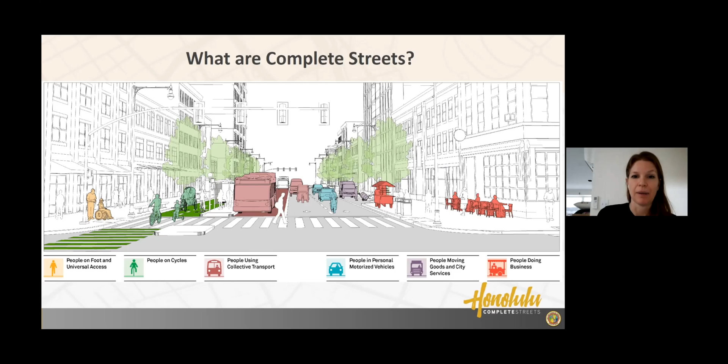Complete Streets actually is a city and county law. We adopted this in 2012, and it says basically every time we touch a street, so if we were repaving a street or something, we have to consider all the different people who want to use that roadway. So what we do is we typically envision those changes ahead of time, and then when a project comes up, say even like a sewer or a water project, something that rips up the roadway, we have an opportunity to put back changes when they fix the road.

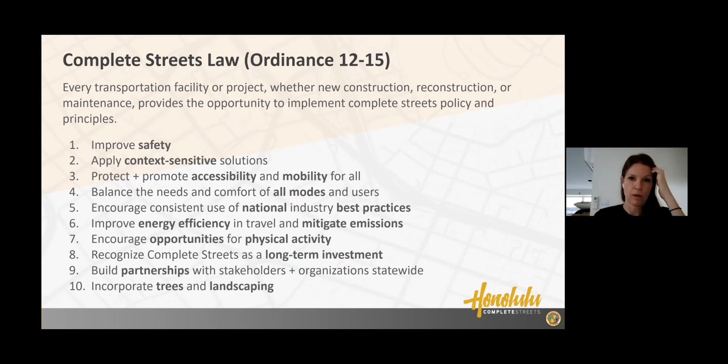And there's lots of different reasons to do this stuff, but as you can see here, the number one goal really is to avoid crashes and make sure everyone is safe. This is a kind of underlying principle that we follow, that one of our major goals is to really control the speed of cars on our local streets.

If you are a pedestrian and you are hit by a car traveling at 20 miles per hour, there's about a 9 out of 10 chance that you're going to survive that crash. On the other end of the spectrum, if a car is driving 45 miles per hour, there's about a 9 out of 10 chance that you will not survive that incident. So one of our goals really is to try to control speeds and bring them down slower to be more consistent with people who are not driving out on the roadway.

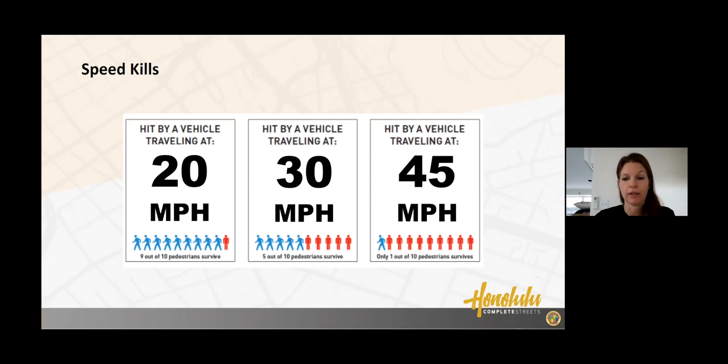And then, you guys are going to get into lots of different principles about traffic engineering, I'm sure, through your program this summer. But one of the cardinal rules of traffic engineering is that you design your streets for, say, the morning rush hour and the afternoon rush hour, right? So you take the busiest time and then you size your streets appropriately. Can you guys think of a problem with that approach?

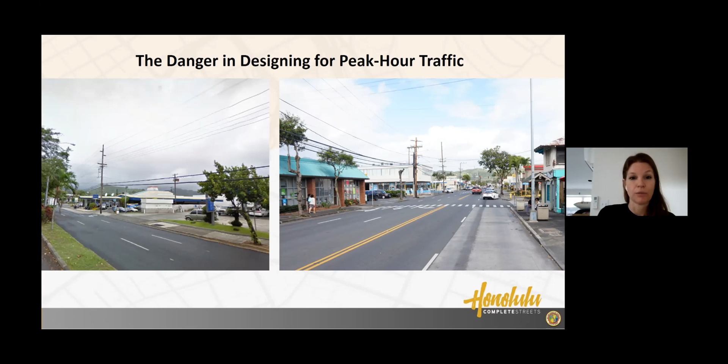What happens for the other 22 hours of the day when traffic is not that high? Then we end up with streets that are basically too big, too wide, very hard to cross, and with less traffic, people can speed on those streets as well. So just something for you guys to explore as you learn more about this profession this summer.

And one of our particularly vulnerable populations that we're always worried about is our kupuna, our seniors. Our grandma and grandpa and everybody. A lot of those people don't drive because either they don't feel comfortable, they don't have a driver's license anymore, or they take the bus because it's cheaper or whatever reason. A lot of those people are out walking and trying to get around on our streets. And unfortunately, we actually have a very high fatality rate for senior pedestrians. So just some of the risks of having streets that are not designed for everybody who may be using them.

And then, talking a bit about bicycles, we do bicycle projects, and those of you who live on Oahu, I'm sure, are somewhat familiar with, say, the King Street Protected Bikeway. One of our goals is to do better bicycle projects. For a long time we did bicycle lanes where we just painted a stripe and then hoped people would ride there, but we're learning that about half of people would like to bike, but don't feel safe with those minimal bike facilities or with no facility. So what we're really trying to get to is building safe bicycle facilities that attract the most number of people. And a lot of those people are very reluctant to mix in traffic, I personally being one of them. So we do a lot of bike projects.

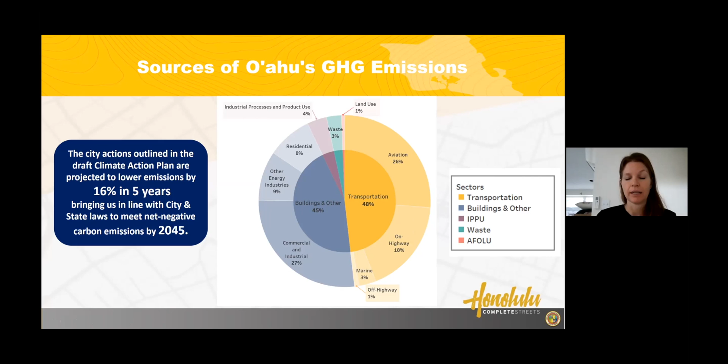Another one of our charges is to help reduce greenhouse gas emissions. So as you guys can see from this pie chart, this is on Oahu. About half of our greenhouse gas emissions are from the transportation sector. So aviation makes up a huge part of that. Obviously, we're not suggesting people walk or bike to the mainland or neighbor islands, but on highway, this is kind of our area where we can try to provide facilities to shift people who may be able to leave their car at home and maybe take a more sustainable means of getting around, either a bus or walk or bike. So that's kind of one of our climate goals as well.

And then related to that, we do a number of improvements with street trees. This shows some examples of new trees being planted, and then stormwater quality, working on some permeable pavements here so that when the stormwater or rainwater hits the street, which is another function of our roadways, right, is to capture stormwater and channel it. The stormwater can actually percolate down into the ground instead of just being flushed through a large concrete channel out into the ocean, which is not good for our reefs and for our ocean health.

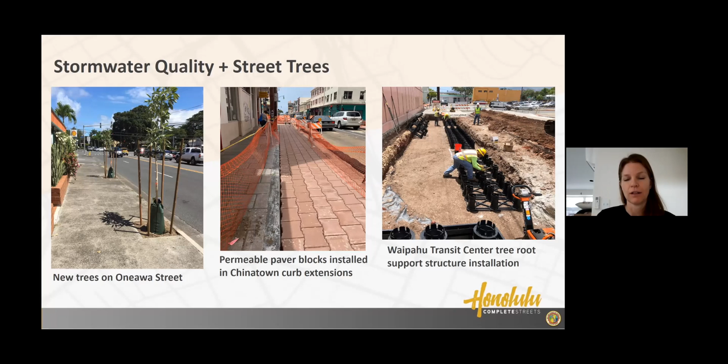And then the picture on the right shows a Silva-cell installation, which goes underneath the sidewalk and provides lots of space for tree roots to grow. So we can get nice, healthy trees on our streets too. So if you do walk, there's lots of shade and it's beautiful, and all those other amenities that go with the transportation function. And then we also deal with transit projects.

So some of you who live here maybe have seen this new bus-only lane that runs through downtown Honolulu, basically taking one whole lane and saying this is for buses. There's so many buses on this street that it's important for us to have a bus-only lane and make sure the bus can be efficient. And then we also have projects like this out in East Kapolei, a number of projects helping people get to and from the new rail stations or the future rail stations out there. So some bus stops at the stations, crosswalks, all that stuff.

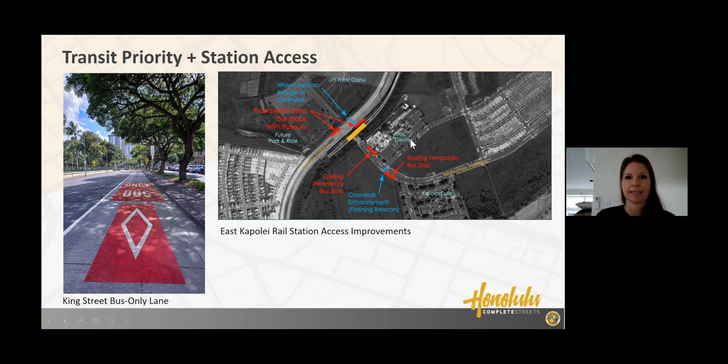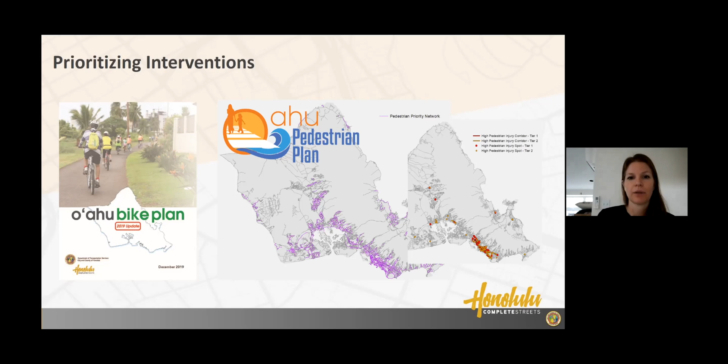We follow several guiding documents, planning documents, that you guys will probably want to reference in your project. One is the Oahu Bike Plan, and that lays out desired bicycle routes all across the island. And then Daniel has been the project manager putting together our first ever pedestrian plan, which we will be releasing in draft form shortly. And those identify crash hotspots for pedestrians, priority missing sidewalk segments, and other priority pedestrian corridors.

So some of the common issues that we see on streets, a lot of them have to do with streets being too wide. So some of our common crash corridors: arterials with 4 or more lanes tend to have more crashes than streets with, say, 2 or 3 lanes. Where speed limits are over 30 miles per hour, we see more crashes.

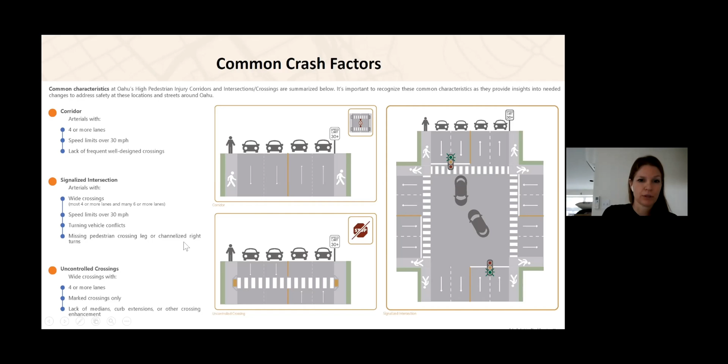Signalized intersections, the same thing, these sort of wide crossings where pedestrians are trying to get across 4 or more lanes of traffic at once. And then signalized intersections, there are a lot of conflicts, right? So intersections are where multiple directions of traffic come together, and there's a lot of different maneuvers and large potential for incidents. So signalized intersections don't seem to fare, I don't think, that much better than non-signalized intersections, probably because they're just busier. But again, it's usually where we have lots of lanes for people to cross. So these are just some of the things to kind of keep an eye out for if you're out on the street looking for conditions that are or are not safe.

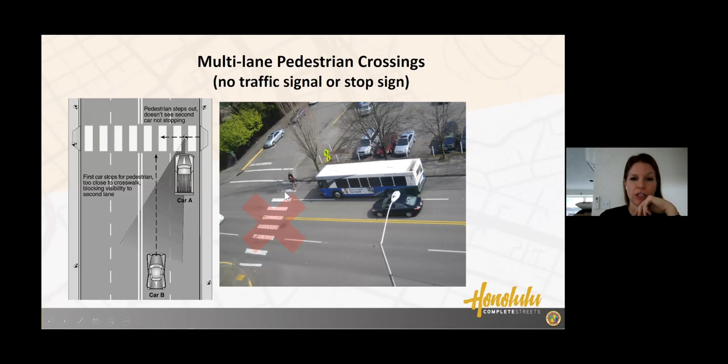Another issue related to the multi-lane is some of our pedestrian crossings. So you guys may have experienced this before. Say you have a crosswalk across 4 lanes of traffic, and these people are waiting to cross, so they'll step out. There's no signal here, right? We're just relying on drivers to stop and to yield. This guy will step out, but because this person in the black car can't see these people walking behind the bus, they may zip right through. So these multi-lane roadways, again, create some safety challenges for pedestrians trying to get across the street, and it's something we gotta address. And so here's some tools for that, right?

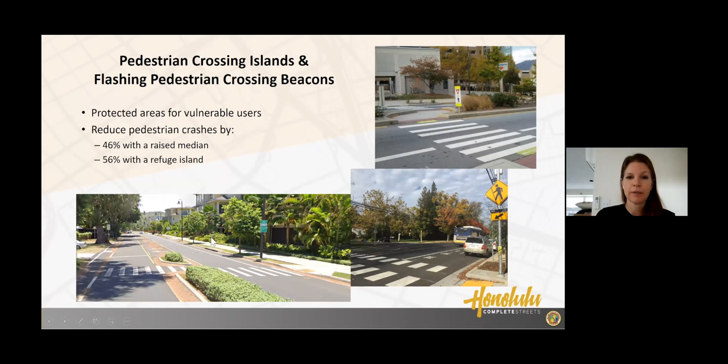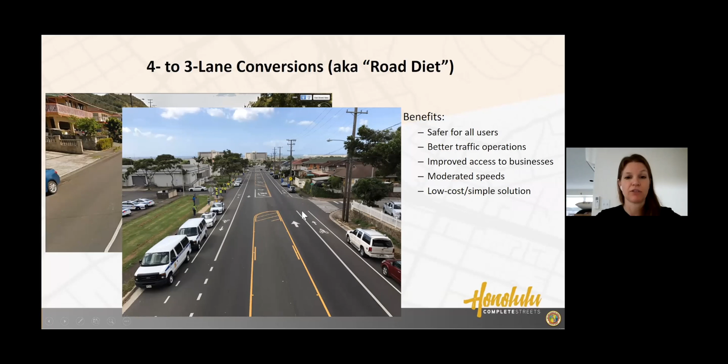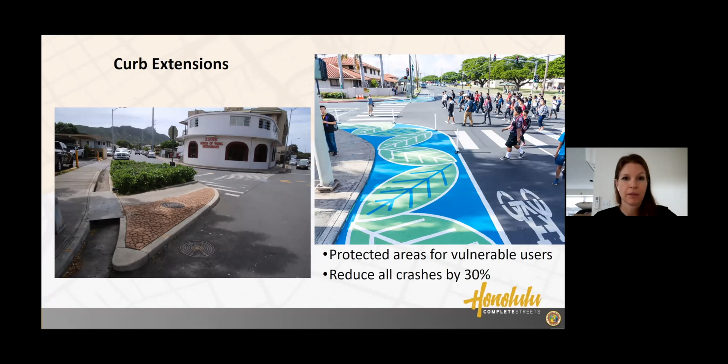Another tool in our box is something called curb extensions. So these are at intersections, and they basically take up space that is really not needed for anybody. You can't park at the intersection anyway because you'll block visibility. And so we like to use different kinds of curb extensions to shorten pedestrian crossings where they are most exposed. So these are obviously built in concrete, and there's some planters in it. This is off Kapahulu Avenue. And then these are ones that we actually did with the community there, just with paint and plastic posts, but they basically serve the same function. So just something to put in your guys' toolbox.

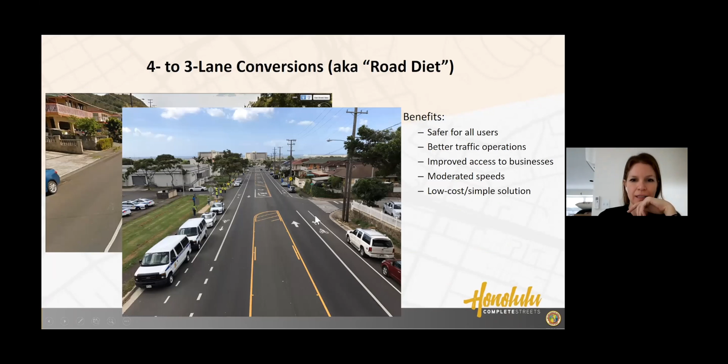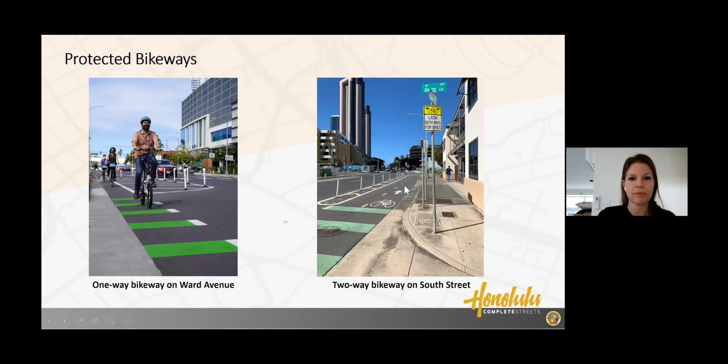And then protected bikeways. So I was talking about how traditionally we just had kind of a white stripe on the pavement and said, okay, here's the bike lane, sort of like this example here, right? But a lot of people don't feel comfortable biking where there's just paint. So we're moving towards doing more protected bikeways, where you actually have a buffer and then some kind of vertical element protecting you from traffic. And these can be either one way on either side, and this is Ward Avenue, the new facility there, or you can have a 2-way facility on one side, and this is South Street. King Street is also like that. And interestingly,

Sorry, we have a baby here.

But it just shows that sometimes better roadway design and better facilities for some users create a sense of order and a better sense of awareness of everybody out on the street. So let me do a quick flip through some of our current projects just to give you a sample, and these are all on our website if you want more information, and then we'll jump to the project corridor that we've identified for you guys.

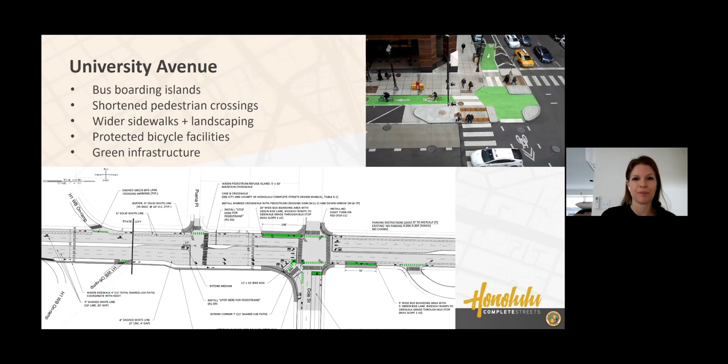Some sidewalk improvements, street tree improvements, and we're looking at green infrastructure as well to allow that stormwater to get down into the ground. Nearby, the University Avenue project ends here near Ala Wai Elementary and the parks. We also are looking at Ala Wai Boulevard, doing some bikeways there, and then we've got a new pedestrian bicycle bridge that is planned at the bottom of University to connect to Waikiki.

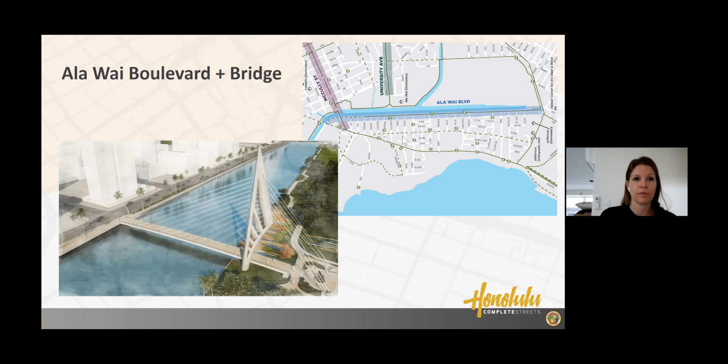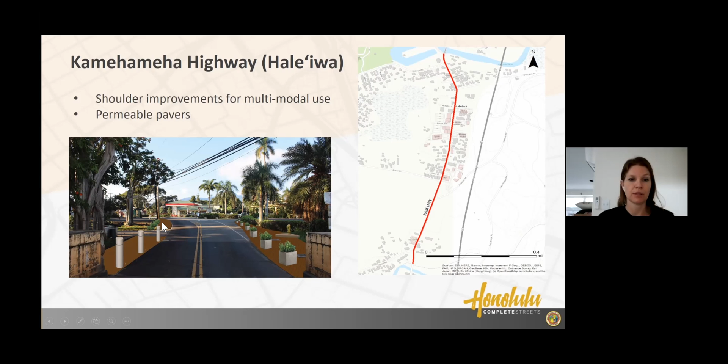Not all of this has to be in town or in cities or in super urban places. We do have a project in Haleiwa, one of our historic main streets on the North Shore of Oahu, where a lot of tourists walk around. And currently today, there are no sidewalks. There's really no facilities for people to walk. So this is a rendering of the project. We're going to be paving the shoulder with some permeable paver blocks, similar to what I showed before, and creating a dedicated protected space for people to walk.

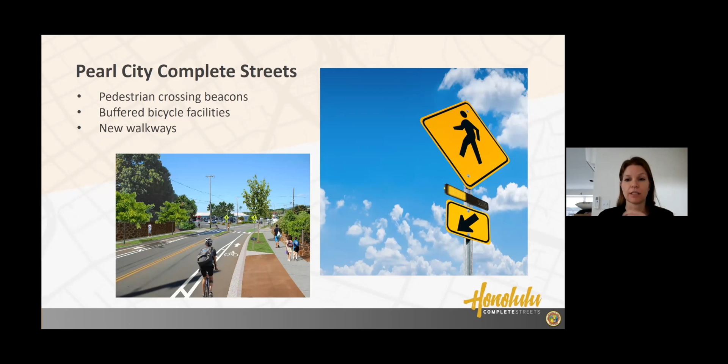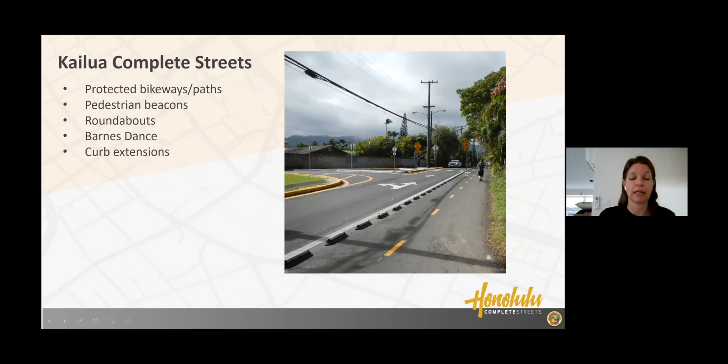Pearl City, we've got some new sidewalks proposed there in the residential neighborhood, and then some flashing beacons where some of the more high volume, high speed roadways are where people are trying to cross the street. Kailua, we have a number of projects proposed there. A lot of them are looking at creating separated paths and separated bikeways to allow people to get around. They have a lot of missing sidewalks in Kailua.

We have selected a street in Honolulu for you guys to take a look at. This is actually a project that we would like to undertake, and we put in a budget request this year to start that process. And being the pandemic and a tight budget year, we actually did not get funding yet. So we don't have the solution for this street. So we're looking to you guys to help provide some ideas for what we can do there.

So Isenberg Street connects between the H1 freeway and Kapiolani Boulevard. It runs through the McCully-Mo'ili'ili neighborhood and is quite close to the University of Hawaii. Actually, Daniel, do you want to do the overview? Let me pass it off to Daniel. He pulled the slides together. All right. Sure.

Yeah, so Isenberg Street, not far from UH, like Renee mentioned. And here's the Google Street View of it. You're looking down and you can see there's a nice park to the right. That's an old stadium park. There used to actually be a stadium there. And you have some businesses on the left. And then as you look further down, you can see residential. There's high-rise apartment buildings there.

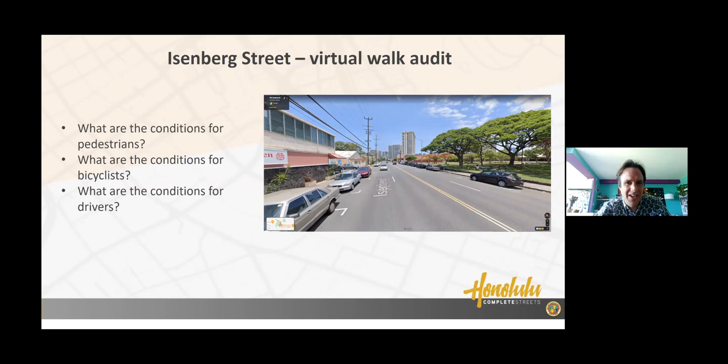If you could let me share screen for a second, Renee. And before we go, we have this concept of a walk audit. And that concept is that we go on to a street and we bring community members and we look at the street and try to think of areas that it might need improving. So we're going to quickly just do a virtual walk audit.

It's, of course, a much different experience if you're there in person because you can see the speed of the traffic. You can feel it in a different way. But this is what we've got here. So the beauty of Google Maps nowadays, and here I'm just going to Google Isenberg Street. So wherever you are, you can do the same thing, but I'm going to drop down here. So it's taken us onto Isenberg, and I'm going to go into Google Street View.

And this is a really valuable planning tool. Nowadays, these maps and images are updated every couple of years or so, and we can use them for even planning. We've used them extensively, for example, in our Oahu pedestrian plan as part of our inventory to understand what's out on the street. So I'm just going to go a little bit here just so you get a sense of the street. And I want you to start thinking about how the street is experienced for the different roadway users.

So we see cars, how it would be experienced as a motorist, how it would be experienced as someone walking, maybe someone with a mobility device, a mobility limitation, and how it would be experienced by someone bicycling. So we've gotten a little character of it. We went from the more commercial side and we've worked our way down to the more residential side.

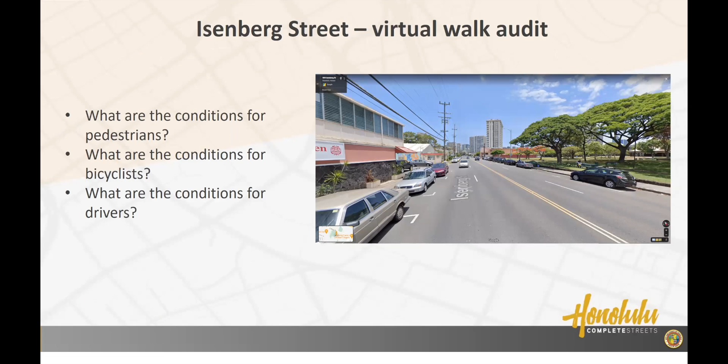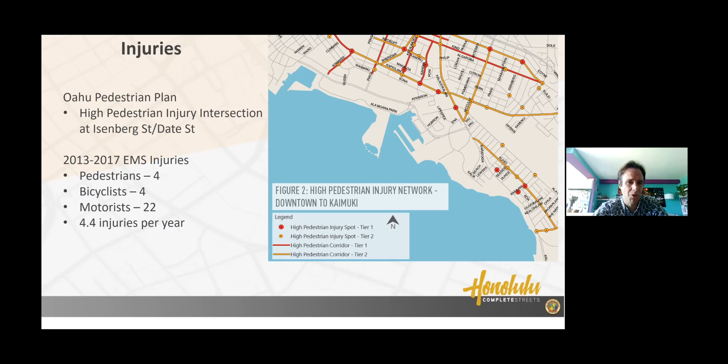So you can see here on the left, that's 5 years of data from basically ambulance responses. And so we have some pedestrians, and we actually have quite a lot of motorist injuries. The hazards out there aren't just to vulnerable users, people on bicycles and people on foot, but also to motorists.

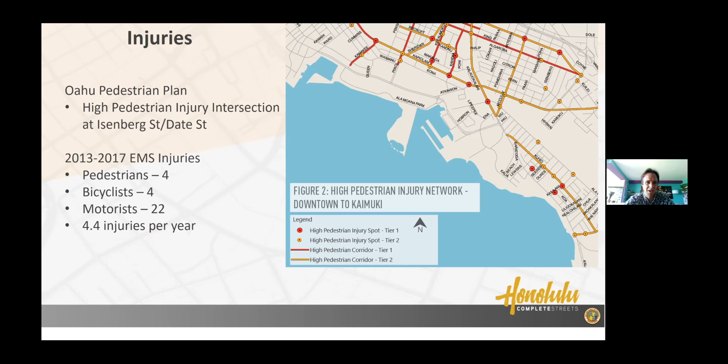And so about 4.4 people per year have been getting injured on the street, which isn't great. That's lives changed. That's cost and maybe permanent injuries for those people, maybe life-changing, at the lowest end a really bad day for them. So next slide.

So that's one thing we should be considering. Our bicycle master plan said, hey, this is an important street. We need to create better bicycle access to the community as part of the bikeway network. And then just noting for the Oahu pedestrian plan, it is an important street for people walking, but it already has walkways, so it's not proposed for any new walkways. It doesn't mean that it might not need pedestrian enhancements, but it already has at least walkways.